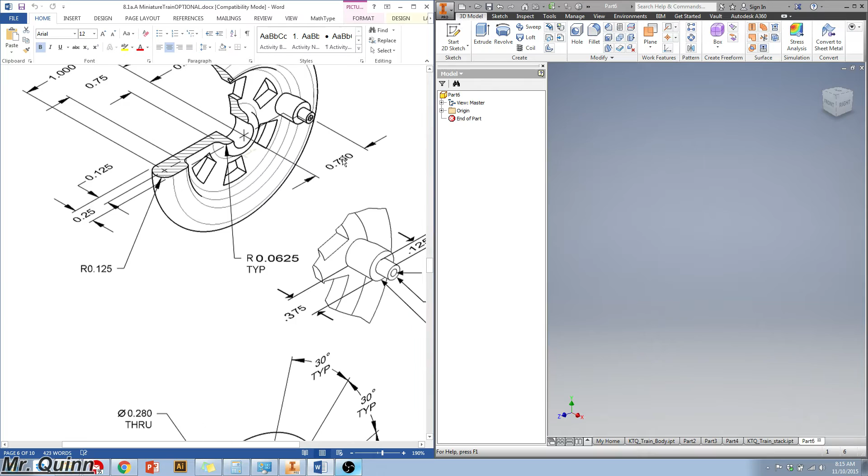All right, so what we're going to be making now is the wheel for the train. The wheel is a little bit difficult, it's one of the more difficult parts in the model train project. You can see right here you have a revolve, and then you have these little cutout patterns, and then a little peg that goes onto it.

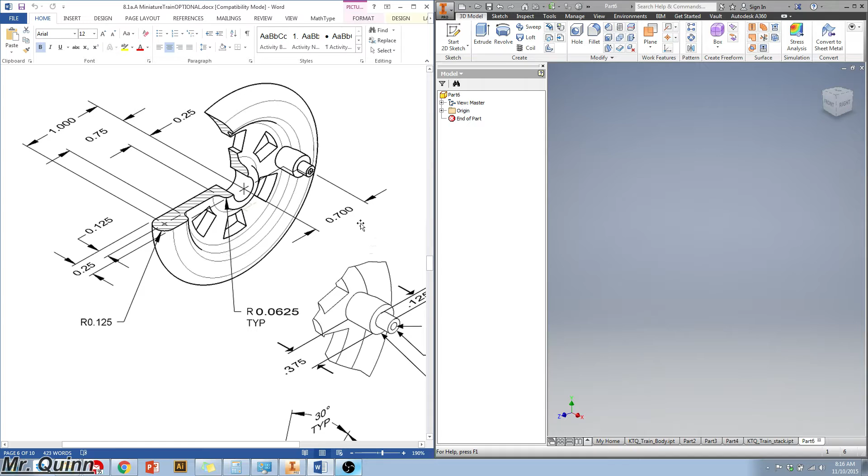I'm going to focus on just getting this revolve done first, and then I'll worry about these other things. First thing you want to do is start a sketch, and I'm going to sketch it along the bottom right here.

Now I see I have a hole that kind of goes in the center, so what I'm going to do is actually just do a construction line that goes straight up, and I'm going to type out 0.25. It doesn't really matter how big you make that, but I would put a dimension on it so at the end we could see if we are fully constrained.

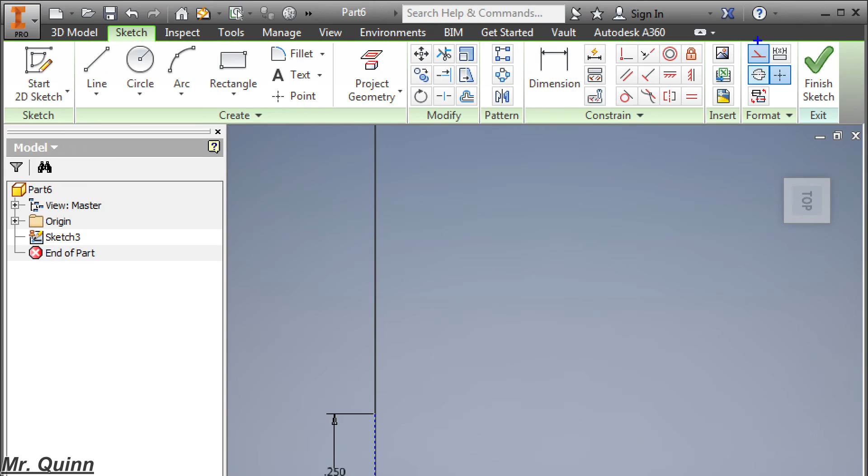Next thing I want to do is make sure I deselect my construction line here. I've got my line tool, and I'm going to go ahead and make this general shape. Let's see, it's 0.25 up, it goes over a little bit, then it goes down, then it goes over, up, and then there's a straight line.

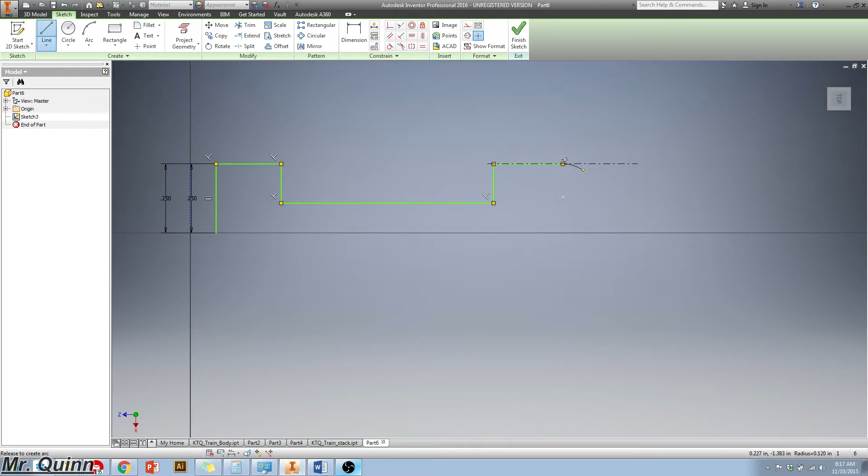Now there's a little curve that happens after this, so I'm going to make sure I hover over this point here. I'm going to click and hold it. If you're clicking and holding, I'm still holding, I'm able to make an arc then. So then I could just let go and the arc is made.

All right, so now I want to put in a few constraints. I can see I'm not kind of locked in along the bottom, so I actually want to make sure that this point is right across from that point. So it's going to be a vertical constraint there, going this point and here.

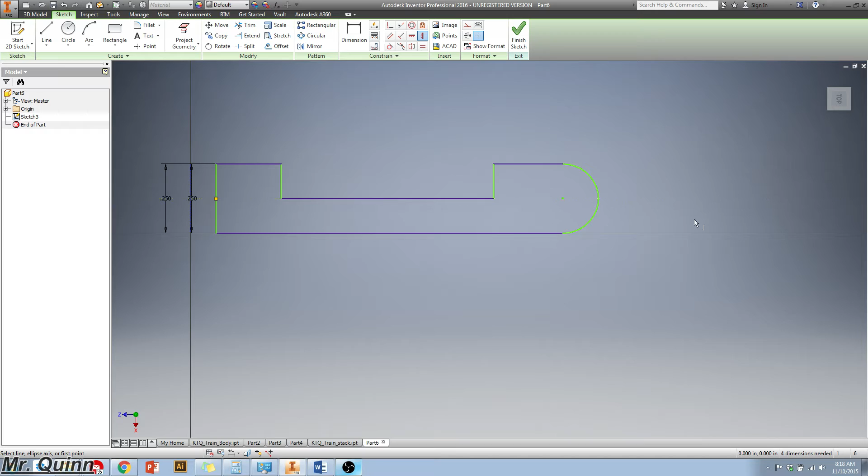Next thing I want to do is, let's see, this point is actually going to be halfway through this 0.25 because it's 0.125 down. And we're good up and down. All we got to do is get our dimensions in left and right now.

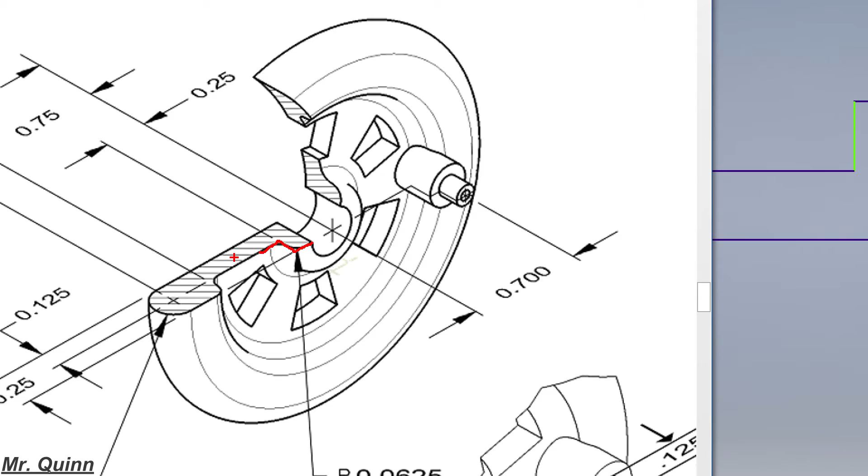I know that we are going with a squared area, and in the picture it actually looks curved there, you see that? But what I'm going to do is we're doing a square, and later on I'm just going to put a fillet on this. So after we do our revolve, we'll do the fillet.

So we want to put some dimensions in here. I'm going to start off with the outside most dimension from this construction line to this point. I'm going to make that 1 inch.

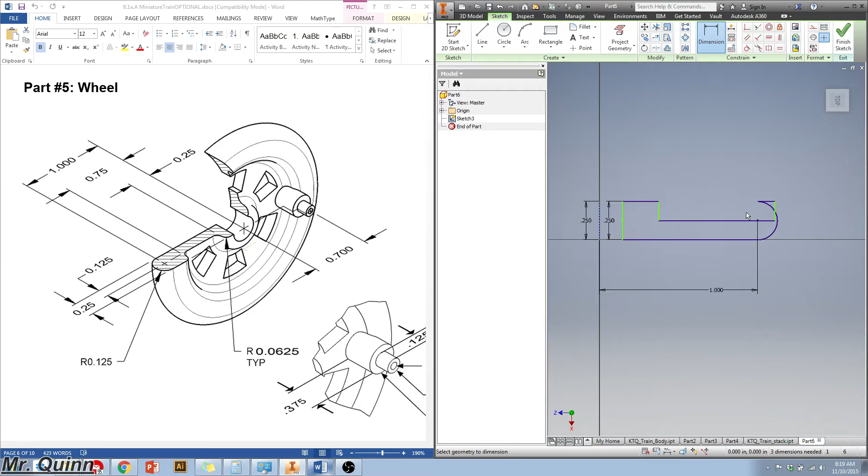Now, if a situation like this happens, which is very likely, what you want to do is just kind of resituate your part so it looks the way it should be. All right, so I'm just going to take this green line and drag it down. There we go, it looks a lot better already.

It's important to kind of just make sure you always have the shape that you want to get here. And if you have any issues, make sure you are fixing it right away instead of putting it off for later.

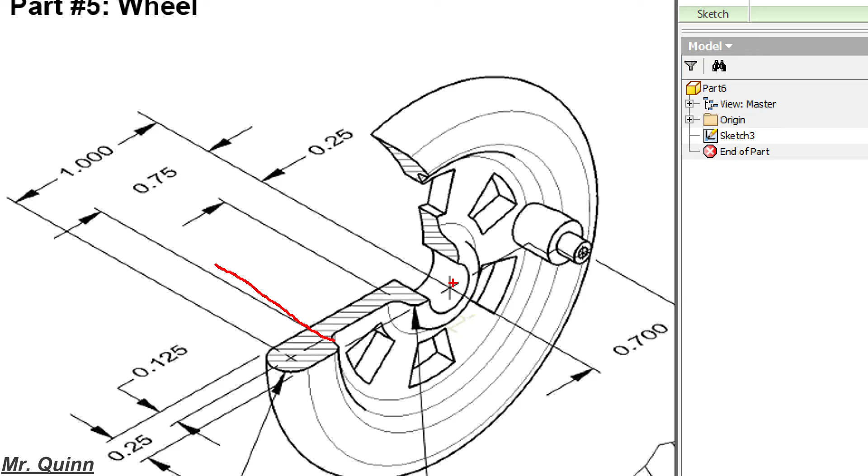All right, next thing we've got the dimension from here to here. And that looks like it is right here, from this line to this line, that's 0.75. All right, from here to here, that's going to be 0.25.

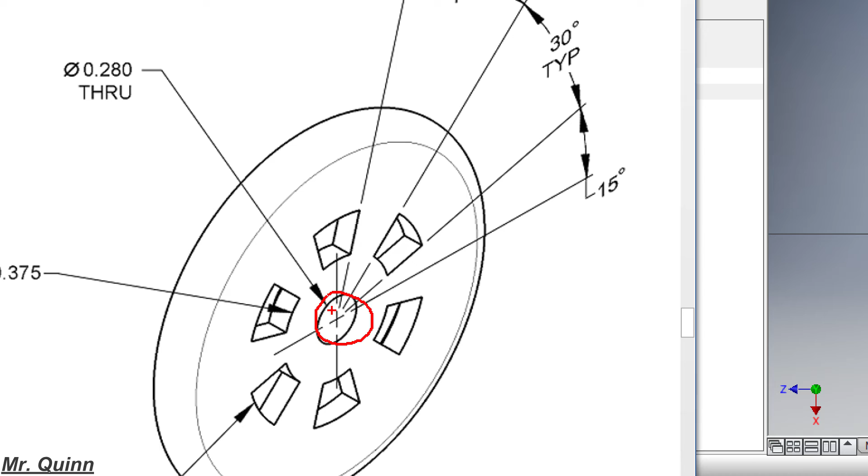Now the hole that goes through the center of this, it's not actually on this drawing, it's actually down here. It's right here. Now since it is a hole, it gives me it in diameters, so I'm going to have to convert this to the radius. I'm going to just click on the construction line, click on this line, it was 0.28. That was the diameter, so I'm actually going to divide it by 2 so I get the radius.

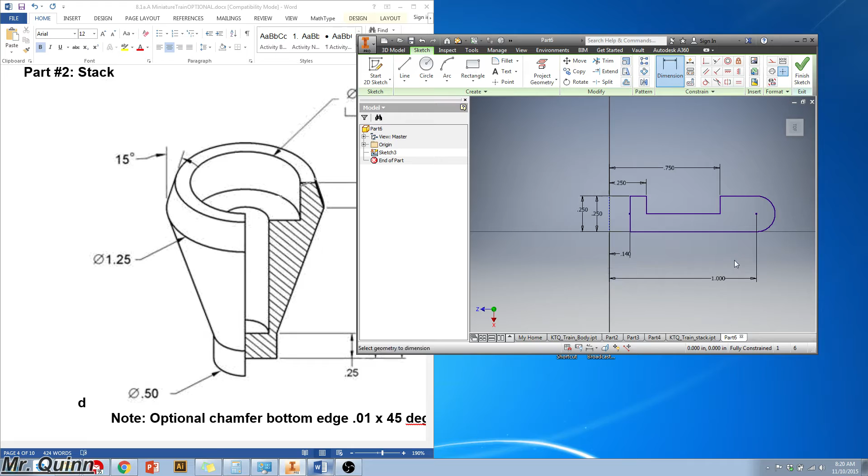Now I am fully constrained there. I can look down here, it says fully constrained. I'm happy. And we can say finish sketch.

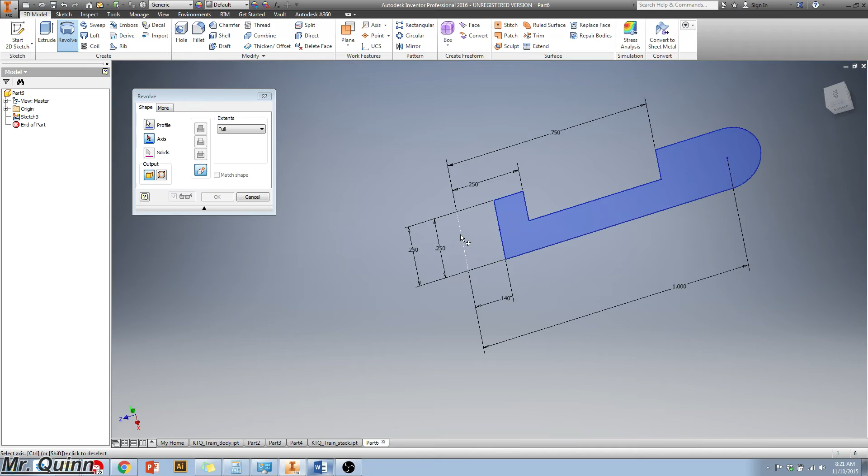All right, so I've got this. I'm going to go ahead and revolve it. Around what axis? This axis. All right, okay.

Alright, so there is my part. You can see I have 90-degree corners there, so I actually want to make sure I get my fillet going here. So I'm going to click fillet.

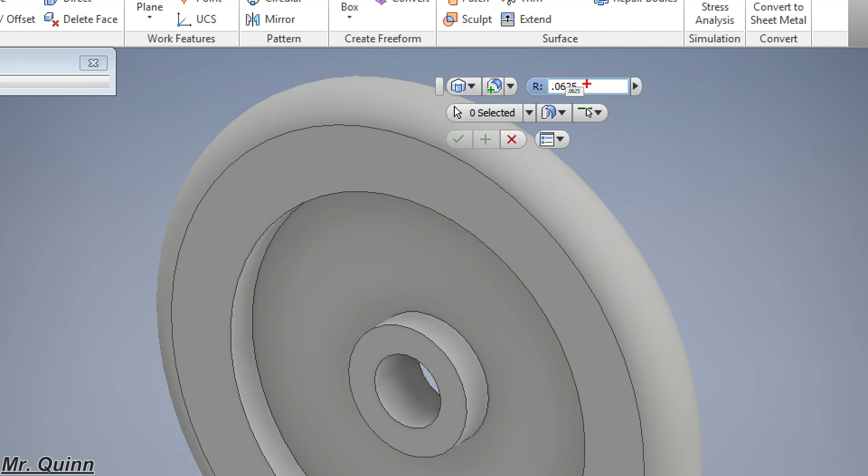And what is that fillet supposed to be here? Let's take a look. That fillet is supposed to be 0.0625. Now this TYP just means typical, so all these are typically going to be 0.0625. So I've got my fillet right here, 0.0625, and I'm ready to select my 4 spots.

So 1, 2, 3, 4. Alright, and that's all the fillets I need. I can click that check mark and I'm good.

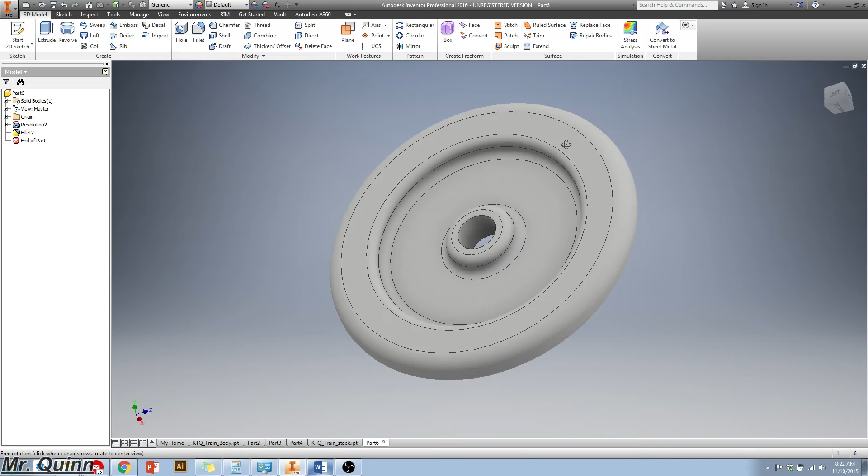Alright, make sure you save your part at this point. So file, save as, and save it.

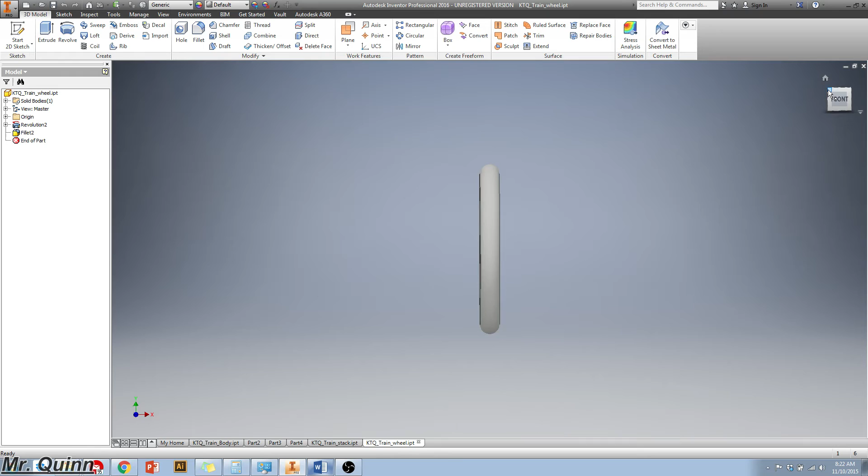Alright, so you know what? I really don't like where my front is right now. I'm going to actually change this up a little bit. What I want to do is I want to have this piece be my front view.

So I'm going to say view, click on look at, click on this front part. I'm going to right click here, set current view as front. And I'm also going to set my home view as right here. So I clicked on my corner right there, right click, set current view as home, fit to view.

So now when I right click home, I've got a better view there. Alright.

So next thing I want to do is I'm going to go ahead and get these little cutouts going. So I can see that I'm just probably going to make this one because that's all the dimensions I have really, and then we'll figure out what we have to do after that.

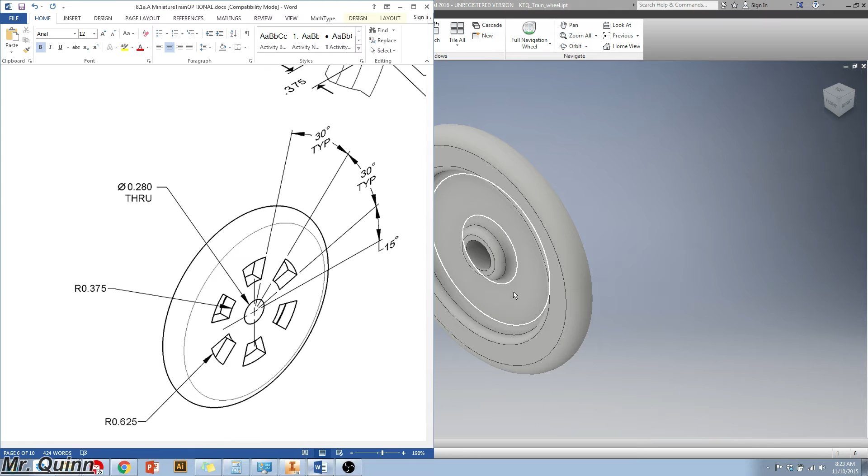Alright, so it'd be hard for me to make it sketching on this plane, so I'm actually going to go to the back. It's a much bigger plane, it's a lot easier to work with, so I'm going to sketch right there.

Okay, so I've got this plane going. I want to go ahead and get a couple of circles going here because I can see I have radiuses right there, right there. It goes all the way around.

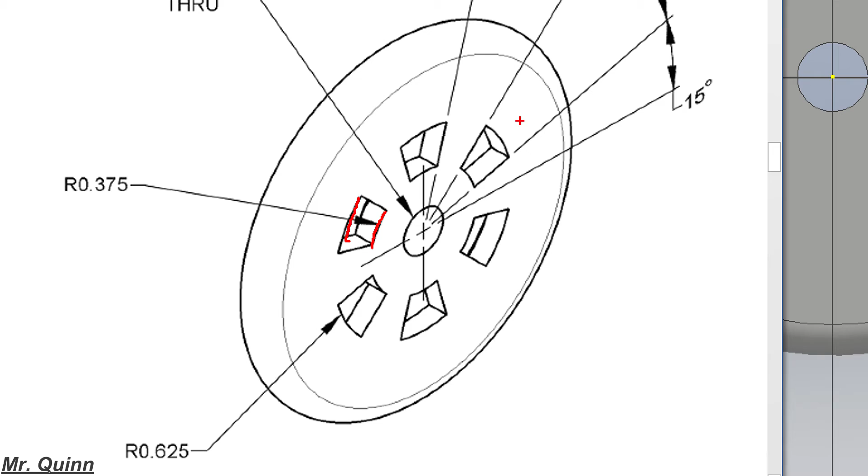So I'm actually going to do a circle first. So I've got 2 circles.

Alright, next thing I want to do is I want to go ahead and make some construction lines here. I'm going to do construction line and do this line that just goes straight out to the right.

Alright, and then I'm going to do some actual lines. So line. Uh-oh, I forgot to get off my construction line. So line.

Alright, so there we go. I've got my general shape right now.

So some things I want to do is I want to trim this up here. Alright, so I can just get this part going. So trim.

Now I've got this going, but the problem is if I drag this line out, all of a sudden this line is not going to the center point anymore. So I'm going to go ahead and make a construction line here, going from here to that point, from here to that point, and I'm going to make that collinear.

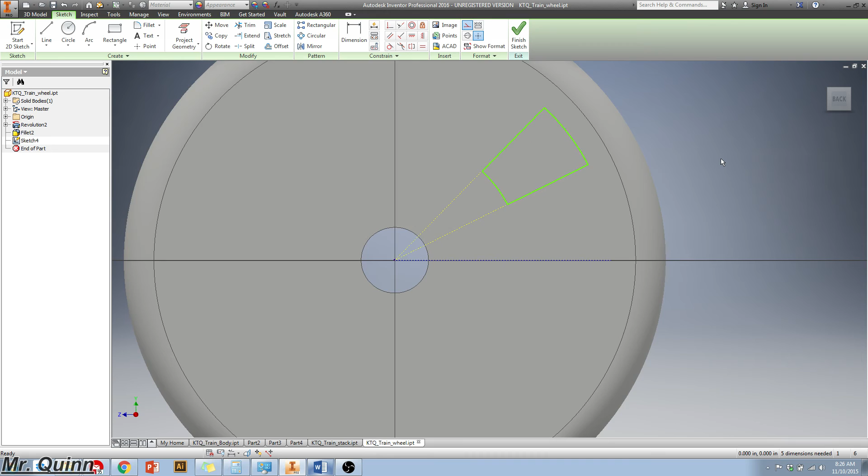So let's get some of these angles going here. From this construction line going straight off to the right, up to there, that's going to be 15 degrees.

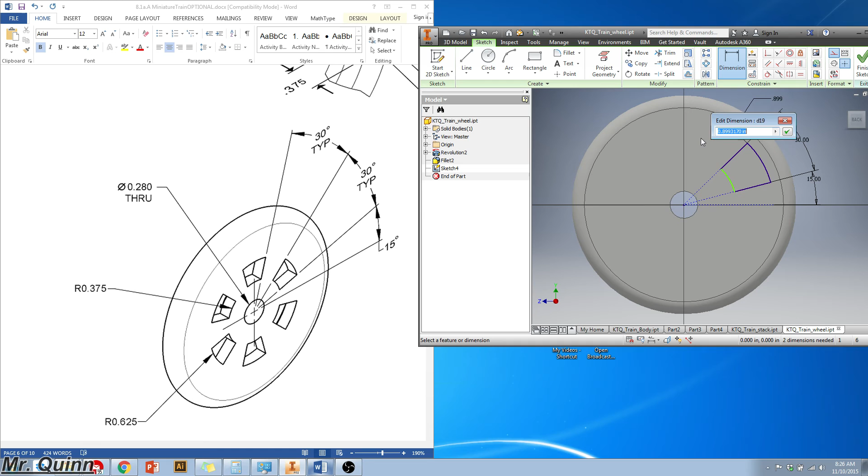Alright, from this line to this line, that's going to be 30 degrees. This arc right there, that's the outsidemost arc, that's going to be

0.625. And then this last one is going to be right here, 0.375. 0.375.

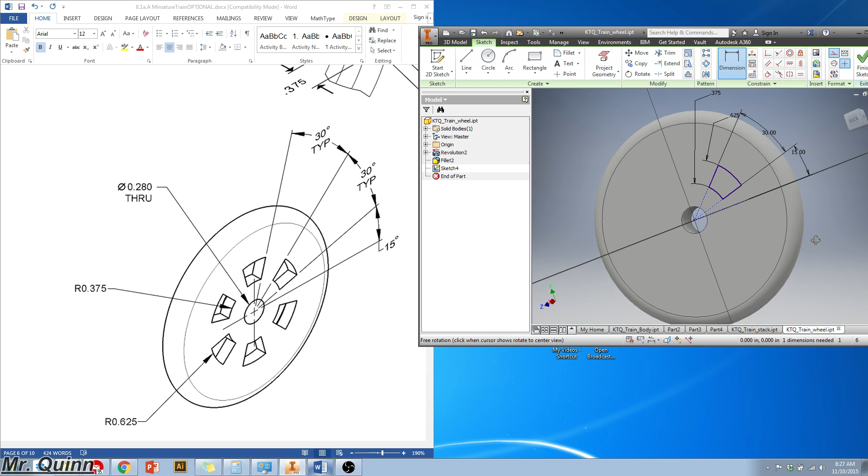There we go. It's fully constrained in there. It looks good. Alright, so you can go ahead and say finish sketch.

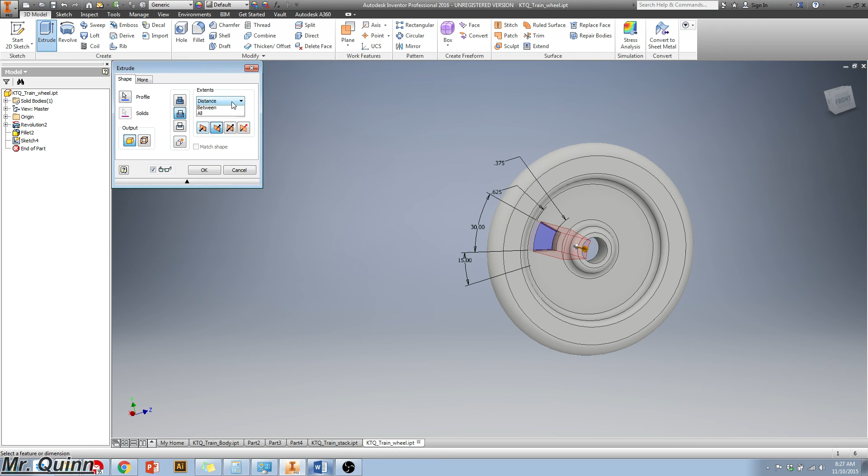Alright, now what's the next thing that we're going to be doing? We're going to be doing extrude. And we're going to cut it. I'm going to go ahead and just say distance all.

Alright, we've got one of them going now. Okay, and we can go ahead and get these other ones in there by doing what? Circular pattern. Alright, so first thing is asking my feature.

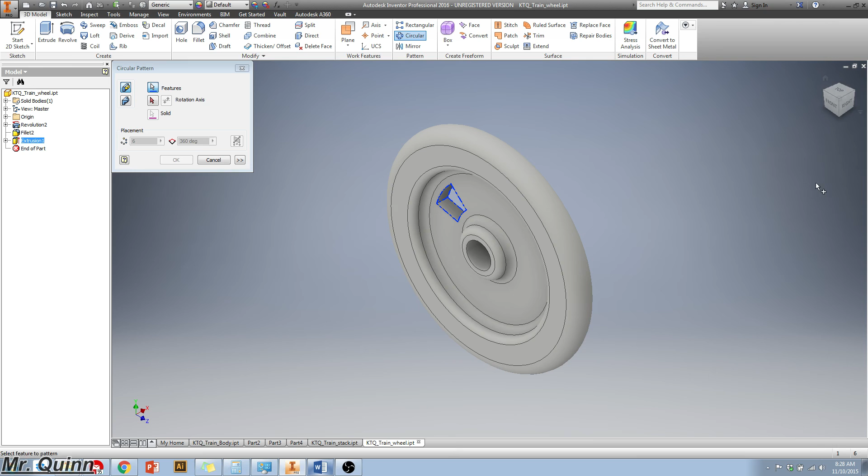I'm going to click my feature that I want to rotate around. What do I want to rotate around? I want to rotate around this circle right there. And how many do I want? How many are there? There's 6.

So 6, and I can say OK. There we go. Now we've got these pieces going. Alright, our last step is going to be getting the little peg that sits out in the front.